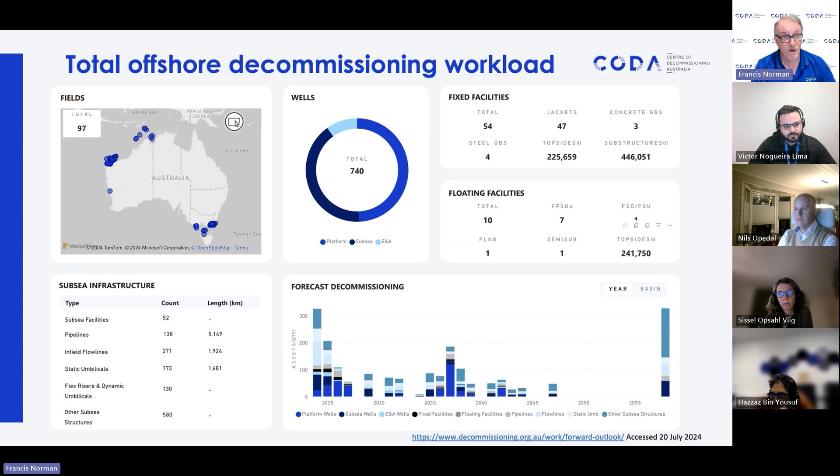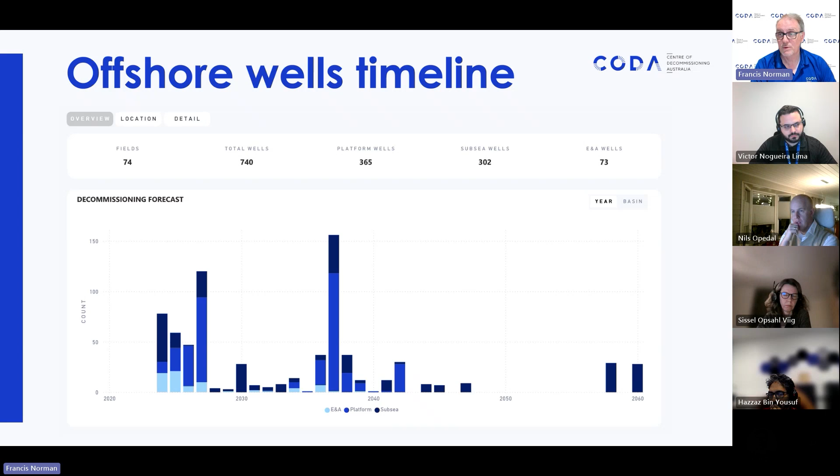In the well space, as you see in the middle on the screen there, 740 offshore wells are still classed as active. So we've got a lot of work ahead of us here as we go forward. The timeline for those wells is what you can see - this is again a screenshot from that same database, and it gives you a real sense of the time frame. Over the next 5 to 10 years, we've got a lot of wells work to do in the offshore space across Australia, plus of course onshore - we're a large continent, we've drilled a lot of holes in the ground over the years.

There's well over 10,000 wells spread across Australia. These are in all different sorts of conditions, in all different states and territories across the country. We are undertaking some work at the moment to progressively start to quantify the onshore well count in a similar way to what I've just shown you for the offshore side. So that gives you a sense of where we are and what we've got going on.

When we established the center and were granted this center, we identified 6 different topics to be evaluated: well integrity, sealing properties of barrier materials, placement of barrier material, verification, and also whether petroleum wells could be reused for storage or disposal. Clearly, P&A tools and operations are very important, and also how to evaluate the results to further utilize them for technology qualification and developing innovations.

So we looked at the industry organization, what is the primary impact towards industry? And for these different topics, we see that we divided it into standards and regulations.

A key here is the NORSOK regulation, developed for the Norwegian continental shelf, but referred to globally. Some topics refer to the operation itself, and a third category is material selection, which we see includes all 6 topics. That's a very important aspect of how to further develop new and cost-efficient technologies.

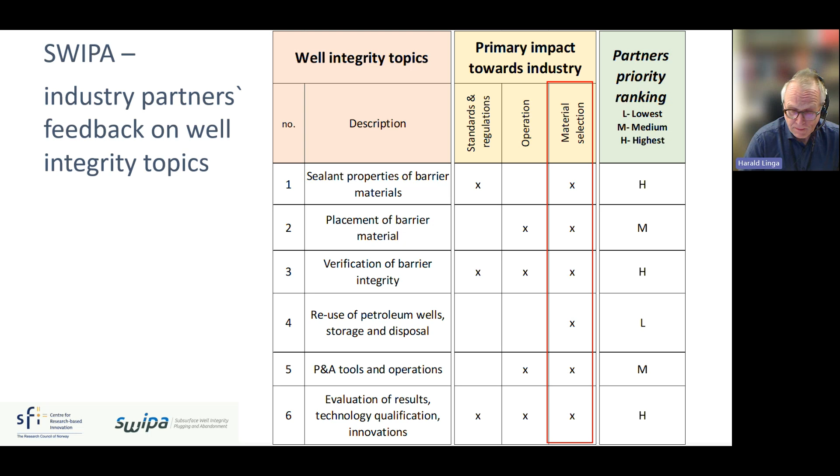The work packages are divided into 4. We have work package 1 and 2, addressing lower technical readiness level scientific studies, laboratory studies at small and medium scales. We also have a separate package on upscaling and testing, where for some materials and results we test the technologies at a higher scale.

Work package 1 and 2 is mainly covered by SINTEF and IFE and the universities, whereas work package 3 is carried out essentially by NORCE at the Ullrigg test site. And we have a special work package on further selecting the results and defining what should be used for further developments. That's work package 4.

As such, SWIPA is a state-funded center. That means we can take the state monies given to the center and direct it into specific technologies or IP technologies for user partners. So a key here is to generate spin-off projects for further elevating the technical readiness level for selected results.

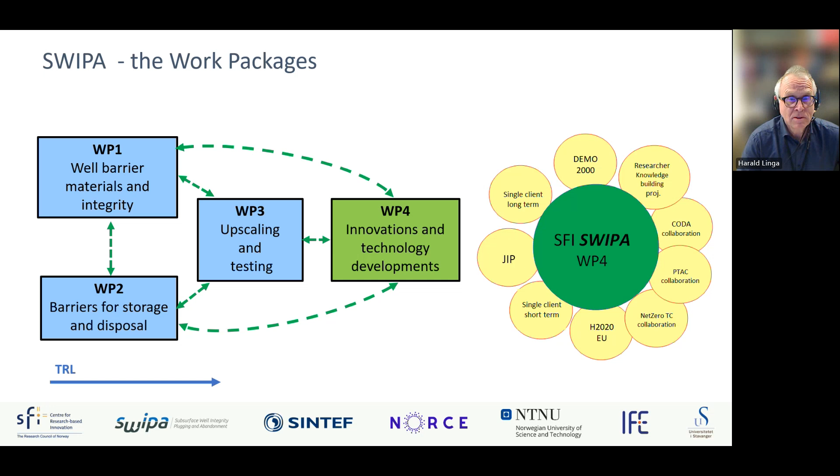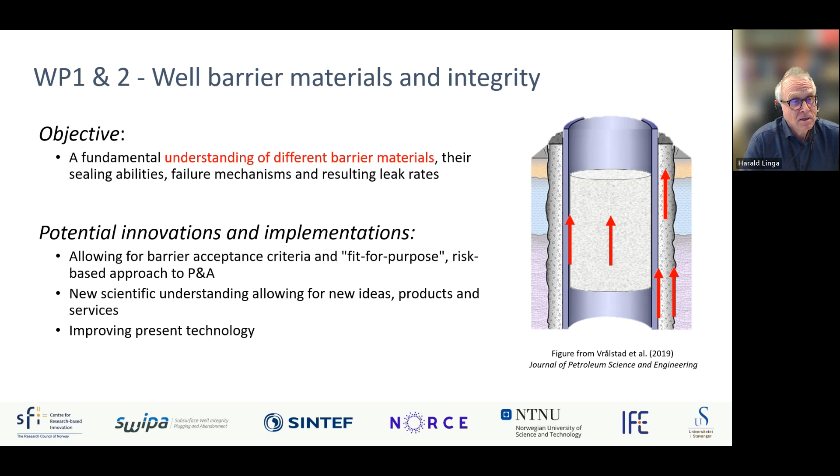Work package 1 and 2, in a way, relates to the fundamental understanding of different barrier materials. So we will potentially use the results for innovation, acceptance criteria, new scientific understanding, and utilize this for improving the present technology. For the upscaling and testing, we investigate the physical and operation scaling effects, comparing the results.

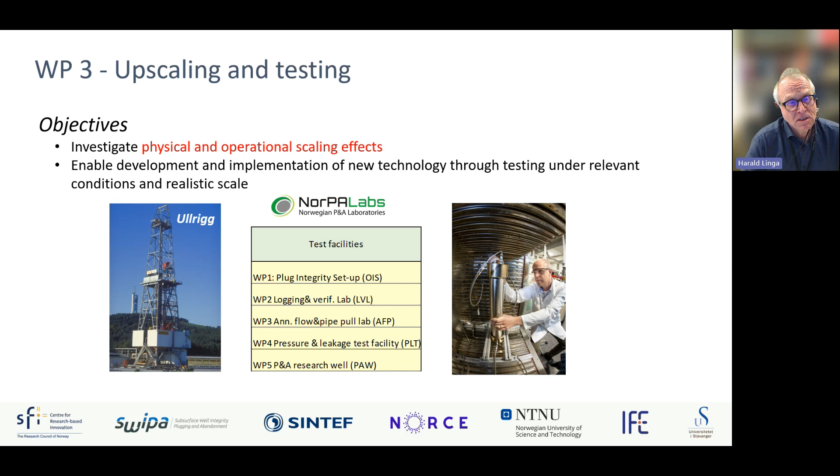As derived at small and medium lab scale, we utilize the Norwegian P&A laboratories, which is an infrastructure grant given by the Research Council for a range of test facilities, also including a P&A research well at large scale.

The operators, when joining the center, looked at this center with a key target to gain a more scientifically based understanding of what is necessary as a well barrier. That includes safety margins and also looking at the barrier elements as a whole, including the formation. So that in a way directs the motivation for joining, to gain more fundamental research within P&A, well barriers and integrity.

And also the operators stated that when it comes to innovation-based technologies, clearly the implementation also needs to have a scientific basis and also to evaluate the results. So operators also considered that the resources in SWIPA could be relevant for testing and performing quality assurance for new technology developments.

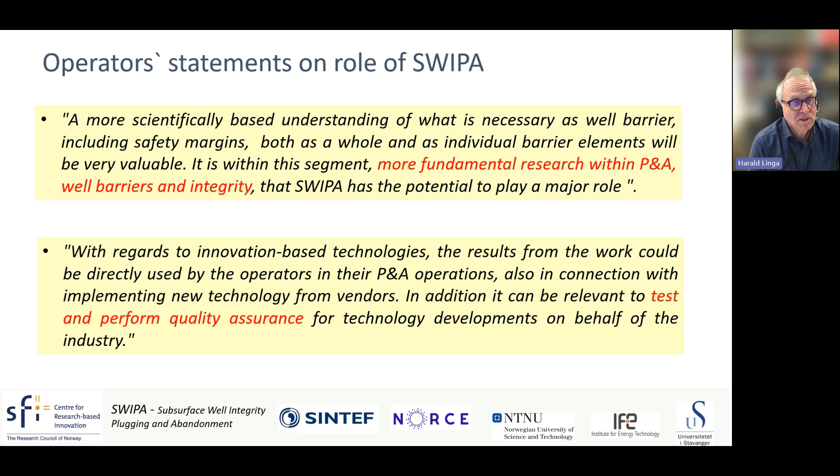So for the ambitions and expectations, to summarize, we aim to obtain a scientific understanding of permanent well barriers, allowing for improved well barrier design methodologies. Key parameters will be costs, materials, barrier lengths, and operations. And we have an ambitious target to reduce the cost by 50% for P&A operations, which also includes revised standards and regulations.

So we have got quite some attention. Bloomberg stated, when the first part of the center was announced, that Norway bets on tech to cut 100 billion North Sea oil well bill. So we have got a lot of attention for this because it's very important for the Norwegian state.

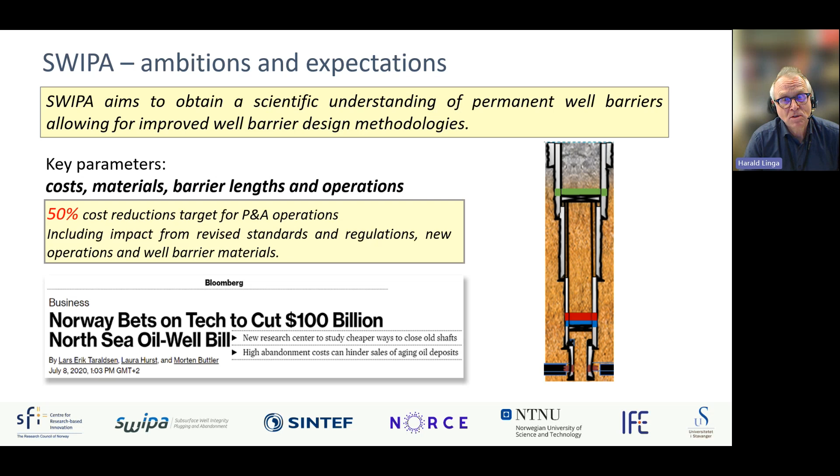It has been estimated to cost 80 billion US dollars to close the 3,000 wells in the years up to 2050.

Collaboration is very important for having success. We have the research partners, which in a way form the national team in well integrity in Norway. With the 5 R&D partners, we have international collaboration, and we also collaborate with national and international authorities, the HAVTIL, which is the former Petroleum Safety Authority, and 3 international partners: Net Zero Technology, CODA, and PTAC.

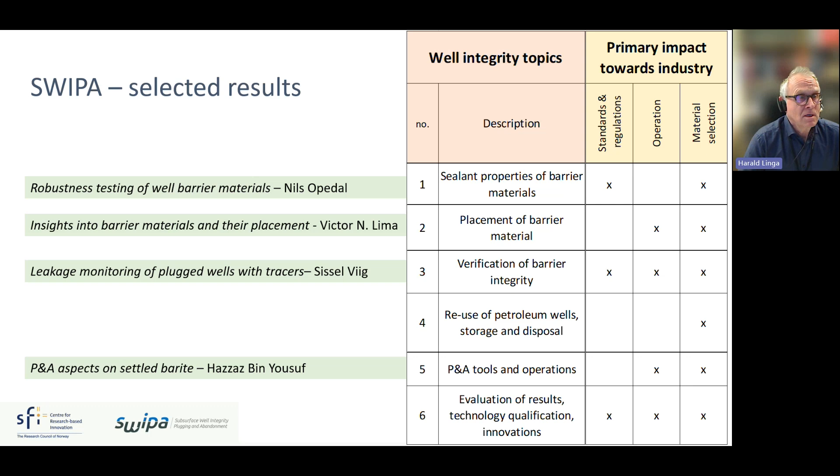So for the SWIPA selected results, we will show as we go along. We have selected for presentation: robustness testing of well barrier materials with Nils, P&A aspects on settled barite by Hazzaz, leakage monitoring by Sissel, and the insight into barrier materials and their placement by Victor. So that summarizes my introduction.

Thank you. Excellent. Thank you very much, Harald. Just as you finished there was a question came in, so I'll ask you that one before I ask you one of the ones that I've got scribbled down here as well.

Do you have a work package on repairing deficient barriers, either side tracks or leaking or misfit barriers? We don't have a specific work package, but we have a lot of testing with new barrier materials which could be used for such a purpose.

Yes, very good, excellent, thank you for that one. While you're talking about new barrier materials, there are lots of alternatives out there now, and just what are your thoughts in terms of how SWIPA would work with those and work with the partners around finding tailor-made solutions with some of those new barrier materials?

We think that can be a vehicle for further utilizing the creativity among the researchers. We have specific know-how on materials and also solutions, not so much operational experience, but I think that the collaboration with the researchers and the industry could be very valuable and give some spin-off ideas and push the technology forward.

So I guess Harald presented this slide also, but I'll go briefly through it. The objective of WP1, the Barrier Materials and Integrity Work Package, what we want to do here is in more scientific detail, try to understand more, not only the barrier materials, as in casing, cement and caprock, but also the sealing abilities, which means also the interplay or the interfaces.

So we do some of the work on a single material alone, but what is more important for us in most cases is also to have bi or three component systems where we try to look at the whole wellbore system. In our experience, most materials are impermeable and solid and robust enough, but often it's the interface that will lead to any kinds of failure or problem in a real well. So we look at the failure mechanism and also the resulting leakage rate.

So the potential innovations, or why we're doing this, is trying to investigate more in detail so we can give a fit-for-purpose design for future wells. Also looking into new materials and new ideas as to how to do well integrity and decommissioning in a better or cheaper way.

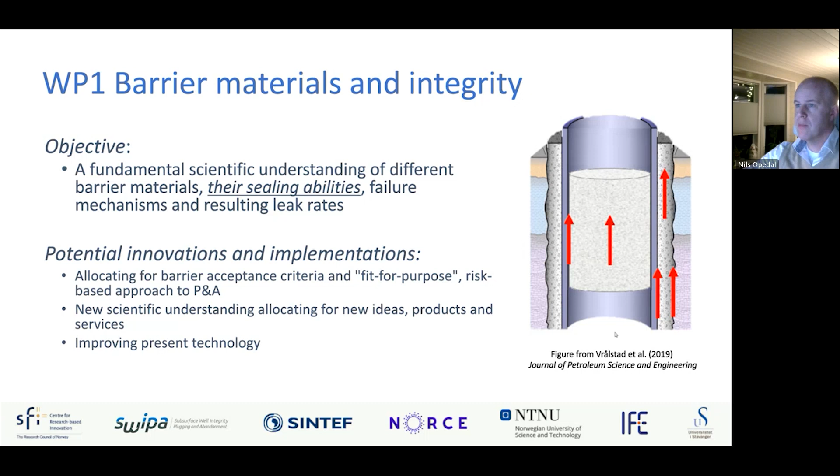Today's presentation will focus more in detail on what we have done, are doing, and will do in package 1.2, again towards the robustness of annular materials.

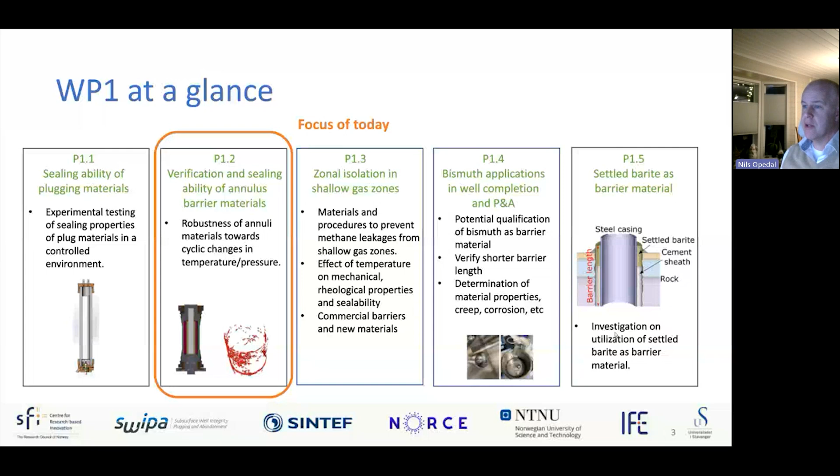We have been doing this now, in the scientific community, for a few years. For SINTEF, we have been doing this kind of testing for about 12 years now. The original motivation and relevance was to investigate the effect of cyclic changes of either temperature or pressure for different wells. It could be for production wells, injection, pressure testing, and so on, and for different well types also - gas storage, production, geothermal, or CCS wells. Different wells will have more or less different magnitudes of cyclic changes. So that was our motivation for starting this.

So the initial objective was: can we recreate cement sheath failure in a laboratory, meaning in a controlled setting? So we should somehow be able to manage this in a laboratory setting. The first thought process was, how are we going to be able to downscale this to a manageable scale, but still large enough to be somehow relevant?

So we took inspiration from a 12.25-inch borehole, a 9 5/8 inch casing, downscaled to about 25%, or a quarter of its value. That gives us specimen dimensions of an outer rock with a height of 15 centimeters and a diameter of 20 centimeters. You see Thomas holding a specimen there, so that's about the dimension of at least the first test. We have evolved the testing over the years with different cells with different capabilities, but most of them more or less follow the same order of magnitude in medium scale specimens, if you like.

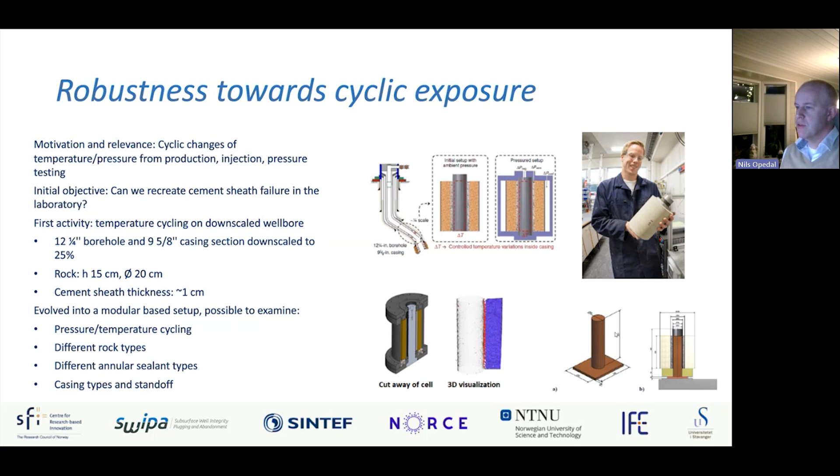Likewise, for the pressure, we have a pressure shaft or mandrel - I'm not sure what it's called in English. Anyway, hydraulically we're able to manipulate the inner casing pressure, where we can again impose different kinds of cyclic stresses from the inside of the casing.

So that was a little bit of what we do with it, a little bit now on what we want to measure, or what we can measure. When we started some years ago, we sat and thought, okay, we can do something with it. We can apply different temperature cycles to our specimens. How can we really measure something?

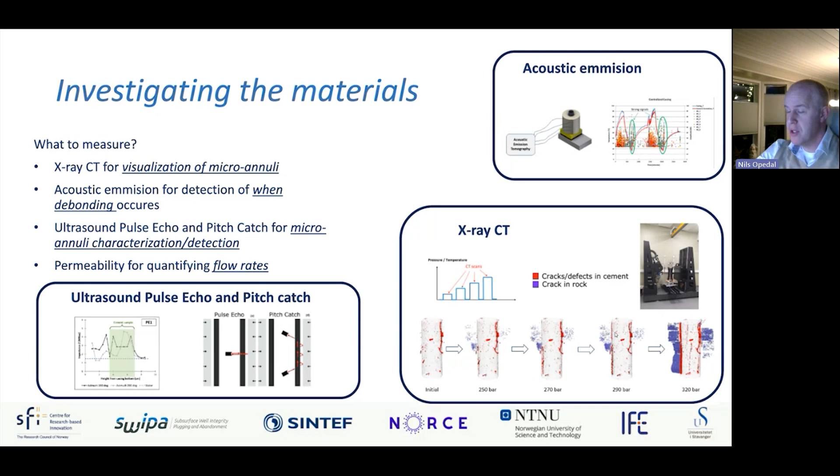I don't have any photographs indicating the permeability test because the slide was full, so I'll move on to the next slide, showing some highlights, some results of what we have from SWIPA, but also from other projects, on our understanding of fluid behavior or fluid permeability in the microannulus for these kinds of specimens.

So how do we do this? There's a very basic P&ID of the permeability test setup where we have a cell. We have multiple cells, which we are able to use to manipulate the confinement pressure, the inner casing pressure, and also the pore pressure. So we can do a magnitude of different things with our cells here.

So what we see when we do this kind of test is that the flow paths, or the microannulus, are elastic within a certain range. When you say flow paths are elastic, it means in essence the materials, cement, rock, are elastic. So that means that, for instance, if you have a mild increase in casing pressure, you can observe a decrease in the flow rate. That is also reproducible when you deplete the pressure.

For this kind of testing, where we have rock and cement and casing, so 3 component systems, we have seemingly lower levels of sensitivity to the confinement pressure. We don't really know why that is yet, since this is quite a new set of testing that we're doing. It could be due to an additional material that absorbs stress, or it could be due to an additional interface that absorbs stress. Another thing that we haven't studied yet is how filter cake will behave in this kind of scenario.

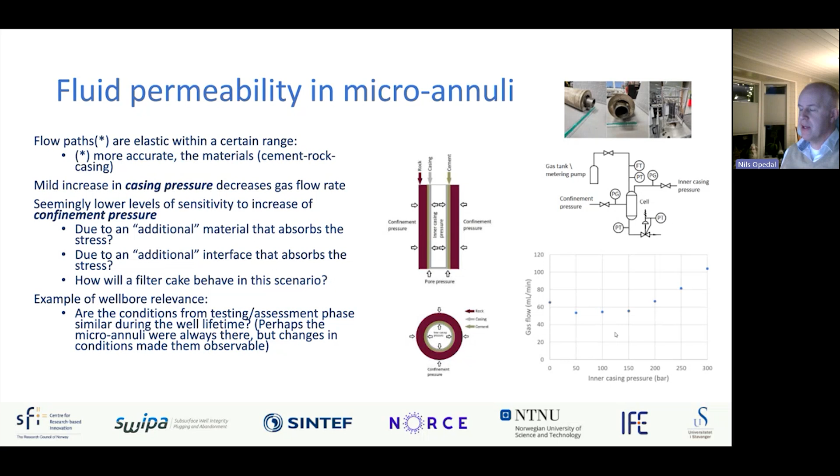Moving on a little bit, still on fluid permeability in microannulus. Fluids mean gas and liquid, and we do both kinds of testing out of scientific curiosity. When we say gas, it means in essence nitrogen, and liquid is brine, can also be CO2 brine in some other projects. The comparison between nitrogen and brine flow in this kind of narrow microannulus is not always straightforward.

The case if you have a dry microannulus and flowing gas through it is pretty straightforward. But if you have, for instance, a submerged sample with the microannulus filled with water and you apply gas through it, the behavior is sometimes a little bit more difficult to understand.

An example on the right-hand side shows gas being tested through a microannulus, and you see it doesn't really stabilize when you have a differential pressure. The measured flow rate doesn't stabilize, showing this seemingly bellow effect when the gas is migrating through a water-filled microannulus.

The bottom right graph shows two sets of samples or tests, one with a dry sample and gas flow, where as you increase the differential pressure, the gas flow increases linearly. Same thing when you do the hysteresis test going down again, it follows more or less the same line.

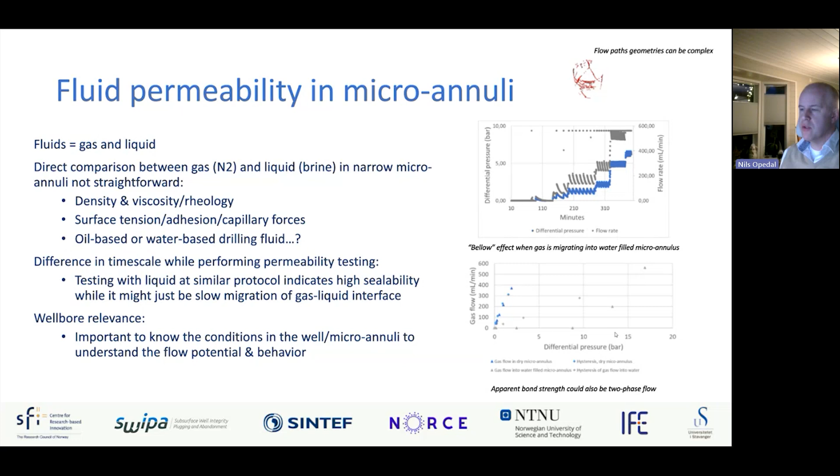An example on the top right is a bit small, but in red, sometimes the flow path geometries can be quite complex. So the wellbore relevance here is that it's important to know the conditions in a well or microannulus to understand the flow potential and behavior.

Second to last slide, I think. When we do mild increases or changes in the casing pressure or confinement pressure, we see more of an elastic region of microannulus size and shape. If we have more drastic or severe casing pressures, we see that we can generate larger fractures in both the cement and also in the rock face.

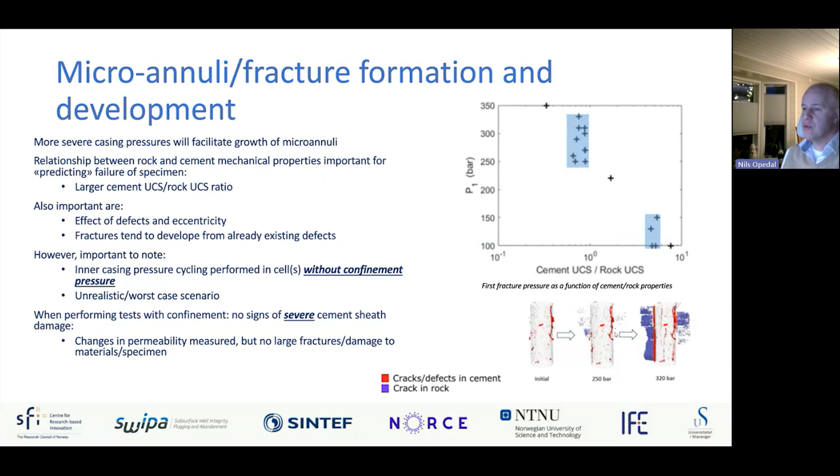It should be noted that some of these tests, in terms of relevance for the industry, have been performed without confinement pressure. That means the specimens or materials will behave differently than they would in a wellbore. So when we get results like this, our understanding is that this is an unrealistic, absolute worst-case scenario, because for most cement and most wells you will not have a pressure difference of 200 or 300 bars, or at least you will have confinement pressure from the surrounding rock in your well.

To summarize, over the years we have evolved our setups with different kinds investigating different items. We are able to examine different rock types, different annular sealant types, casing type and standoff, in a controlled laboratory setting where we can do pressure or temperature cycling tests. This gives us details on how and where cement-rock interfaces or materials fail, and also enables us to investigate multiple interfaces and the behavior of the microannulus. This is relevant for injection, geothermal, gas storage, and/or CCS wells.

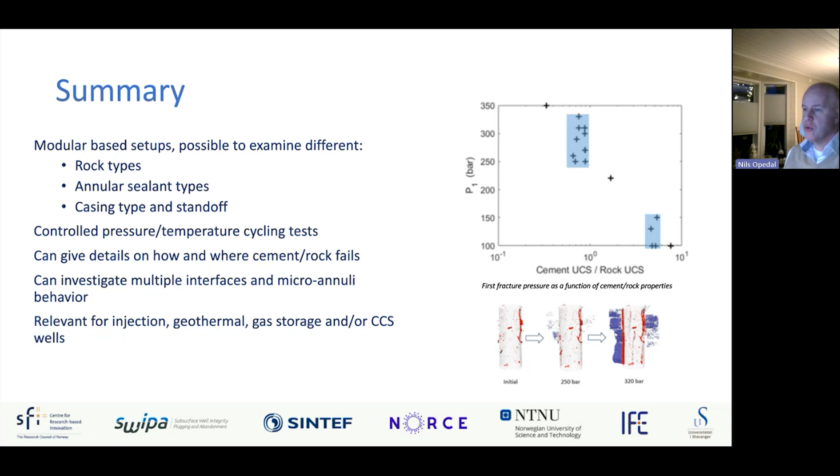I'm not sure if I'm over my time slot here, but that was my last slide, so I'll be happy to take any questions.

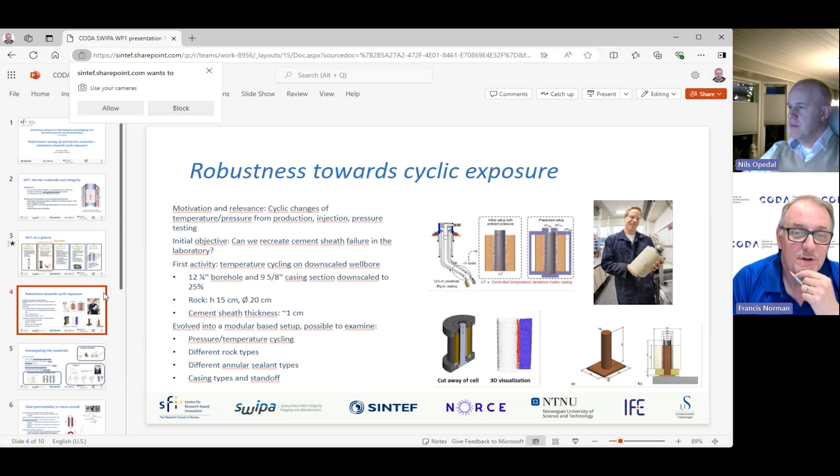The biggest thing is that we have done a lot, but there are many materials in terms of rocks and cement types that we haven't tested yet. So one focus is on different materials, we'd like to fill in a larger catalog or library of material types in relation to each other. Another focus has been implementing the ultrasound probe. We have this for small-scale tests in the CT setup, but we're trying to implement it on the large-scale setup, which is difficult with larger scales and pressure types. We want to test both permeability and visualization on specimens, getting details on the ultrasound response to learn more on the logging side.

Very good, thank you. Having given people a minute or two to put a question in, we have an interesting one here. It's a two-parter, so I'll ask part one first. Are you able to create scenarios to model downhole formation stress changes on cement sheaths over time?

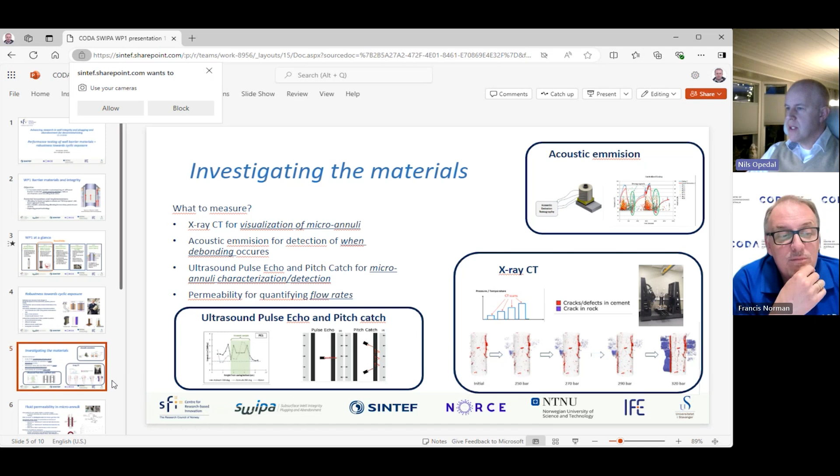Yes, if I understand correctly. So how can I show this then? The specimens look like this, three components: rock face, cement, and casing. When we do this testing, we haven't done all the different settings yet, but we're able to manipulate casing pressure, pore pressure, and confinement pressure. We haven't investigated the effect of confinement pressure much yet, but that's something we're looking into now. Again, a library catalog of different materials, but also for the same three-component materials, investigating the cycling effect of both inner casing and confinement pressure to see how at different pressures a rock behaves in relation to cement - in essence, the interfaces. That's something we're just starting to scratch the surface on, but we're looking more into that now. So the answer is yes, if I understood the question correctly, we're starting that now.

The second question is, do your analyses cover future impact of CO2 related activities on legacy cement? Yes, we're able to perform permeability or flow testing. That's also on our to-do list. We're a bit behind schedule, but it's definitely on our to-do list for the same kind of specimens talked about here. We can easily shift from nitrogen gas flow to brine CO2 flow through this test to see how self-sealing effects and so on will occur in these test specimens. This is definitely something we're going to look into. We were hoping to be finalized by this autumn, but in essence it will mean probably next year - that's how time goes. But yes, we have the capability for these kinds of tests, and it's something we're looking into.

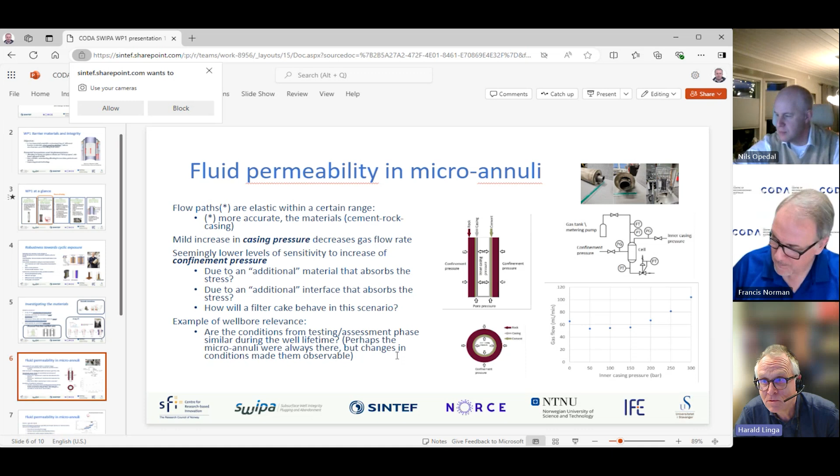Yeah, this confinement pressure is clearly an important issue. I think you have indicated, Nils, in the UCS results, or the impact from UCS for rock versus cement, that this is really addressing or impacting the performance of the formation-to-formation sealability. So we still have some more work to do there, but it's clearly very important, as Nils has indicated in this graph upper right.

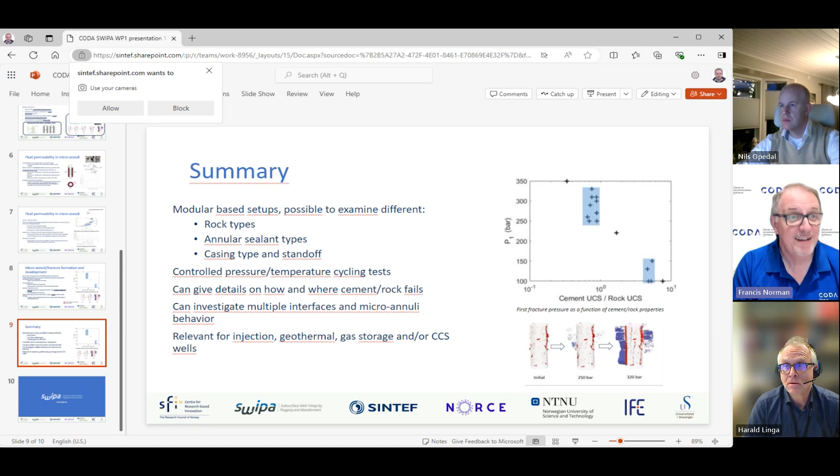I'd like to welcome you to my presentation on settled barite as an annular barrier, characterization and refinement, which I am currently doing as my PhD topic, and this is my third year in PhD.

First, I would like to say a little bit about myself. I am currently a PhD candidate at UIS. I completed my master's in petroleum engineering from NTNU, and then I worked in Chevron for 7 years, where I did everything: drilling engineer, onshore, offshore, intervention drilling, P&A, perforation, rig inspection, acceptance, everything. After that, I moved to Norway and started my PhD.

Let's talk a little bit about our agenda. I'll talk about our background, the type of methodology we are currently using, a little bit about our results, a little bit about the potential, how we can use my research in the industry, and what my deliverables are. I hope you will see something very interesting in my presentation.

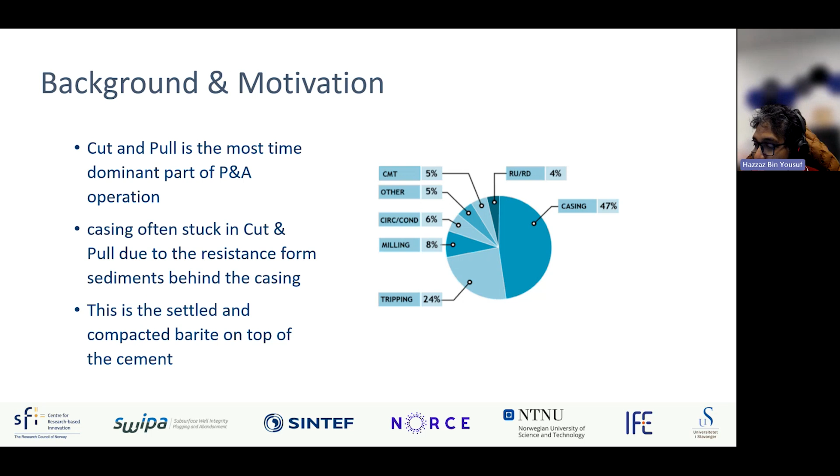So my research is very simple. I have to find the reason why it's happening, I have to find a way to solve this problem, and I also have to see if we can use this as a barrier itself. We like using the problem as the solution to reduce the cost in the P&A operation.

As I told you, my plan is very simple: find the reason, find the solution, and find the way to use it. We believe there will be different impacts - we can minimize the risk of operation, reduce the time of cut and pull, or if we can turn it into a barrier, we can reduce the P&A time, which ends up saving a lot of money, and we will have a new type of barrier.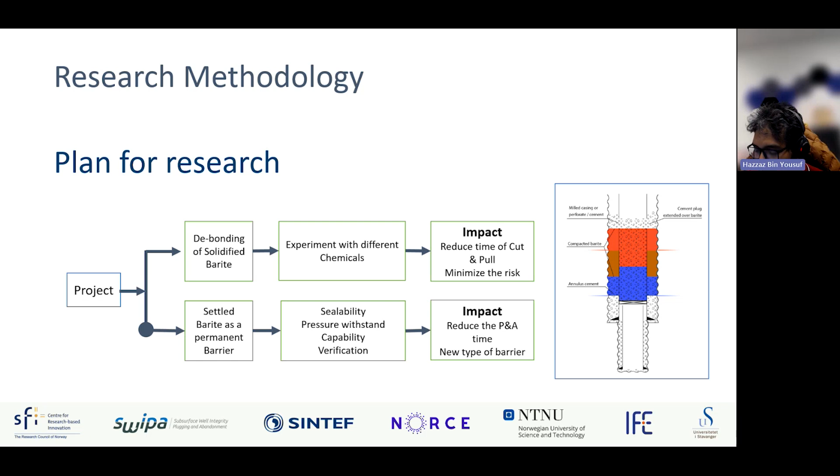We started our research in March 2022, and we were kind of lucky because in August 2022, Equinor told us that they had recovered some pipes full of settled barite from the North Sea, which gave us a big opportunity to look at the real thing and work on it. So we've done a lot of characterization on those materials, a lot of experiments, and after these experiments we found some interesting results.

Firstly, from XRD, we have seen that there are no new phases of barium in this settled barite, which indicates that the settled barite formation process does not involve any reaction.

It is a physical process, and we also see that there is no cementation. The particles are very compacted, but they are really strong.

We tried to look at the elements, and we found one element that is completely new. It was not in the cuttings, and it was not in the drilling fluid either. The element is iron. We have seen a large amount of iron in this material.

We tried to do a QEMSCAN to see how the materials are arranged, and we saw that this iron is actually creating bridges between the barite particles. This solves the answer to our first question: maybe iron is the reason we are having this settled barite problem.

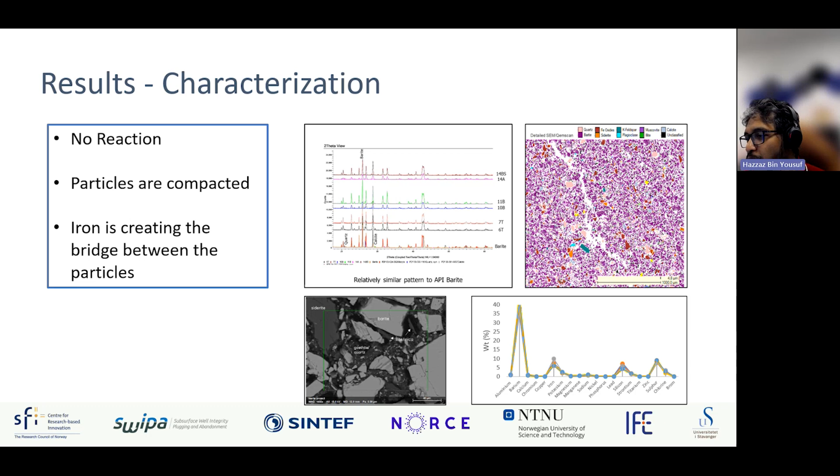Our next job was to find a solution. The solution is to break this settled barite. If we can break it, we can circulate, and if we can circulate, we can do cut and pull the casing out. So we have to find a way to break this settled barite.

There are two ways. One is if we can take the iron out, we are destroying the bridges between the particles, which weakens the particles and solves the problem. Or we can go after the barite itself. If we can dissolve a lot of barite, that helps weaken this settled barite formation.

So we tried chelating agents, and we found that if we use EDTA at normal pH, without any pH modification, it attacks the iron, takes the iron out, and weakens the formation. We also found that if we use EDTA at high pH, like we use for an acid job or a barite scale job, it can also weaken the settled barite formation by dissolving a lot of barium materials.

We also found that the performance depends on the pH and on the concentration of the material, how much EDTA or other chelating agents we use. We found that the whole family of these chelating agents can work to dissolve or disperse the settled barite.

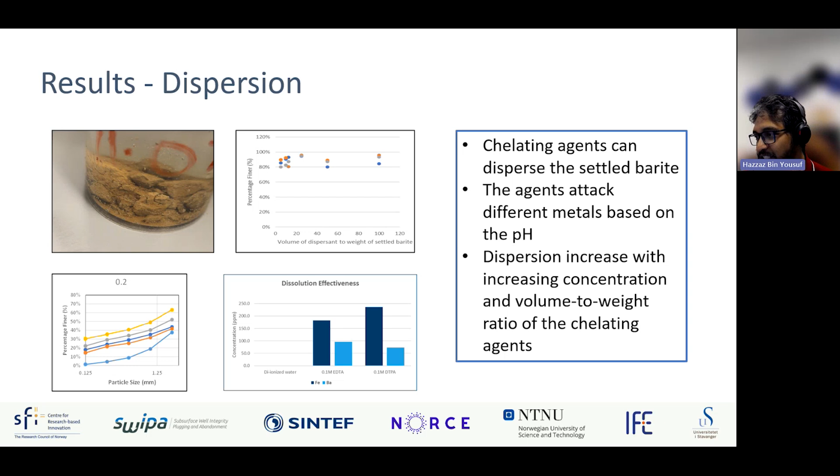Number three is the hardest part: settling and making the settled barite itself. That is, if we can find a recipe which, when pumped, will slowly settle down, compact, and solidify on its own, which can be used as a barrier during the P&A.

So we found in our first research that iron is the reason the settled barite formation happens. We then wanted to test the effect of not only iron but all metal ions, to see if the metal ion itself has this effect, or how metal ions affect the standard drilling fluid. We found some really fascinating results.

We found that trivalent metal ions, both iron and aluminum, destabilize drilling fluid very quickly in a very small amount, within minutes, if we use some kind of iron salt or aluminum salt. The other monovalent and divalent ions don't have that immediate effect. However, if we keep this for 45 days, as you can see from the chart, these other ions can also destabilize the drilling fluid in the long run.

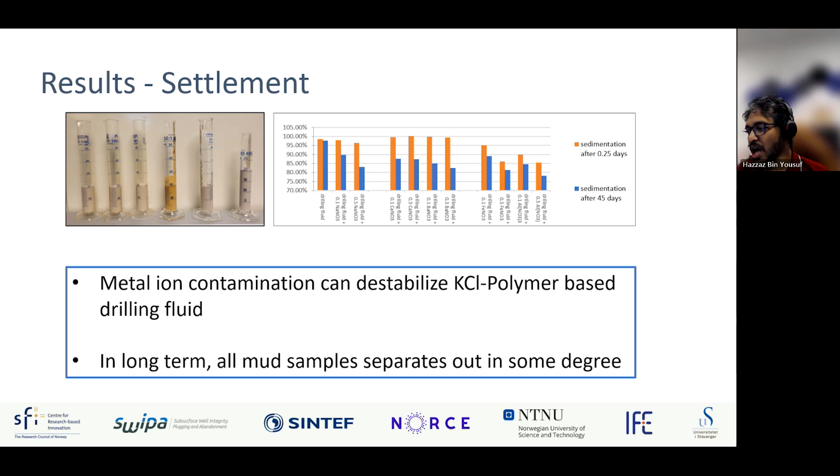So how can we use our research? As I told you, I have 3 objectives: find the reason, find the solution, and find a new barrier. If I can complete all 3, that gives us a lot of potential for industrial use. As we found that iron is responsible for the formation of settled barite, now we know we have to do really good hole cleaning to prevent the problem. We have to get as much iron out of the well as possible so it doesn't go on to destabilize our drilling fluid in the long run.

Number 2 is the solution. We found that if we can take out iron or take out barium, we can solve the problem of settled barite. So now we have to find a solution that can satisfy HSE and other standards, a solution we can use to take iron out of the settled barite material. The problem isn't easy to solve, because we're pumping something that will take iron inside the iron pipe. So it's a bit complicated, but we're currently working on it.

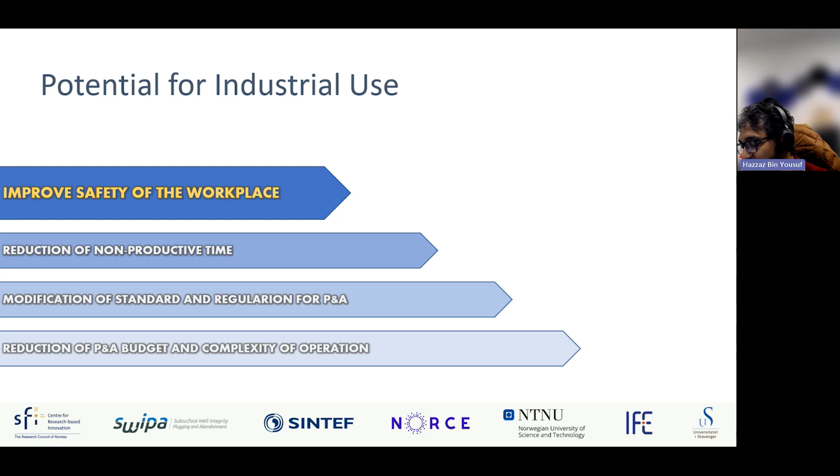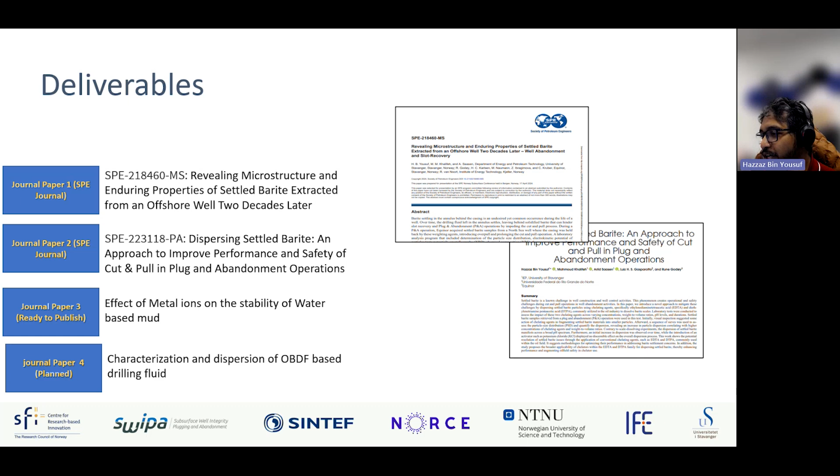Finally, deliverables. We have published 2 journal papers in SPE, you can see them here, and we're currently writing a 3rd journal paper on the effect of metal ions on the stability of water-based mud, as I've shown in the slides. Currently we're working on oil-based mud, similarly trying to characterize this oil-based settled barite, and trying to find a solution to disperse it. We hope we'll find this and can show you some results soon.

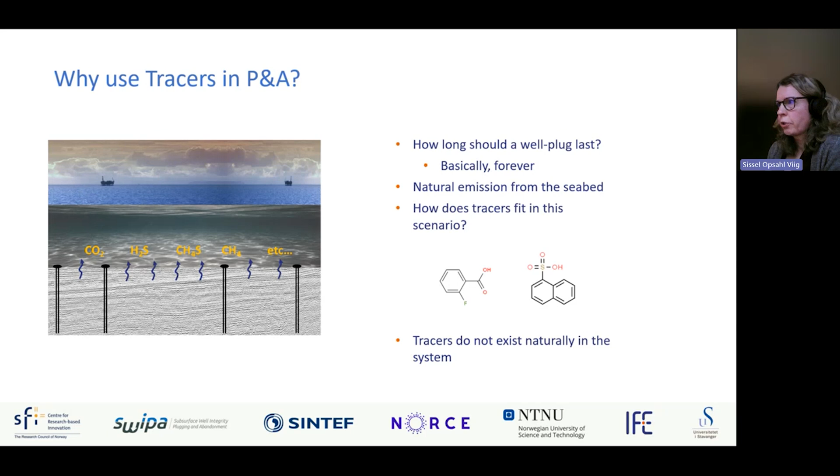So if you include tracers in your plugging system, this tracer will be unique in the environment, and if you detect it at the wellhead, you will know for sure that you have a leakage from your plugged well. In oil and gas operations, tracers are conventionally used for interwell applications to characterize the reservoir, fluid communication, distribution and circulation.

It's also used to evaluate oil saturation in swept volumes. But when it comes to P&A operations, they can be used to monitor fractures, microfractures, or porous matrix communication between the well, a plugged well, and the seabed, acting as an early warning system. Because the tracers are unique in your system, they give you a unique identification of a possible leakage.

Also, in our research, we have been working on water-based tracers. They are already proven for reservoir applications, and they're relatively cheap to be used.

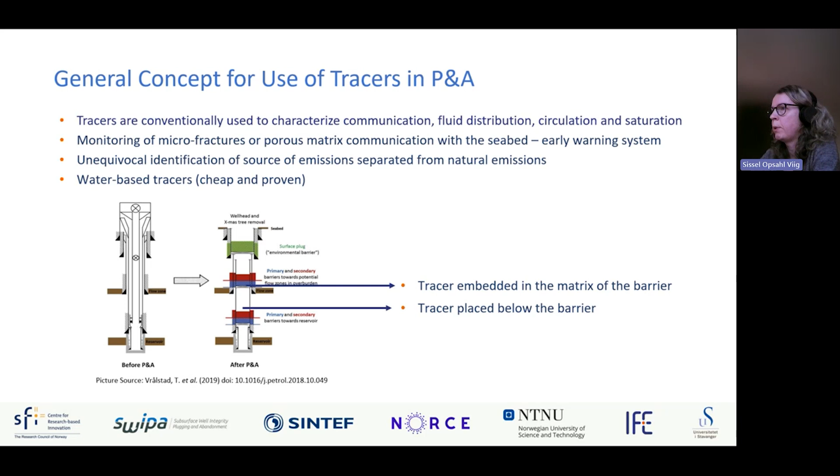In our work we have done laboratory experiments, not any real field applications or research, but we see two possible ways of including tracers in a plugged well. Either the tracers can be embedded in the matrix of the barrier itself, or placed below the barrier, as illustrated in the picture on this slide.

So when we select and develop tracers, they have to fulfill certain criteria. You need to know that the tracer is unique in the system it's going to be introduced to, and that you can detect small concentrations or amounts of it, so it's easy to detect even small leakages. Normally we can analyze down to PPT level of a tracer. They need to be environmentally acceptable, and they have to have a reasonable cost.

And when you have some tracer candidates selected based on these criteria, they have to be qualified for the system they're going to be studied in. They need to be stable for the time frame of your test, both in temperature, chemical stability, and biological stability. It's also important that they don't interact with anything in your system. You don't want them to soak into any surfaces, because this will prevent you from monitoring your tracer. You also need to investigate the dynamic and flooding properties of the tracers at conditions relevant for your system, to know that it's matching the movement of the phase it's supposed to trace.

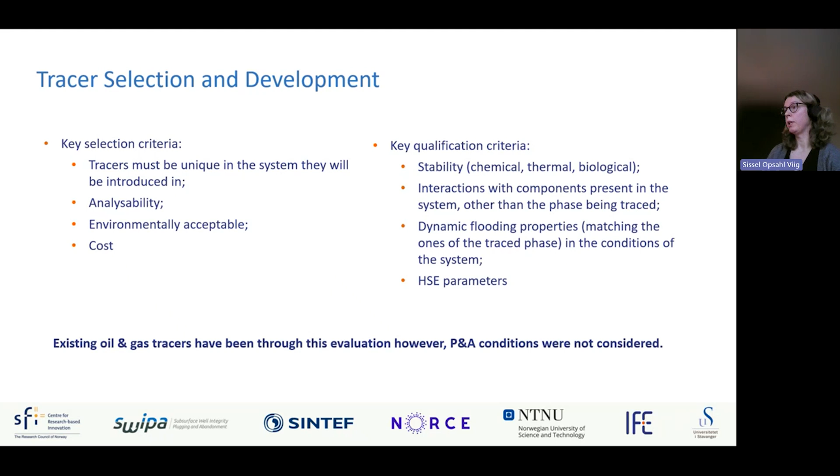And then, of course, you have the HSE parameters. For the tracers we are studying, the existing oil and water tracers for oil and gas reservoir applications, they have been qualified on all these criteria. But when it comes to plug and abandonment, the conditions are different. We have different materials, and they might interact with the plug material, for example, and this is something that has not been considered. So it's important for future development.

As I said, we need to know that the tracers that flow through the system don't interact with any surface. In a plugged well, the barrier material, like cement, is highly active surface, and it's likely there might be an interaction between the tracer molecules and the cement or other plugging materials. So that's something important to investigate.

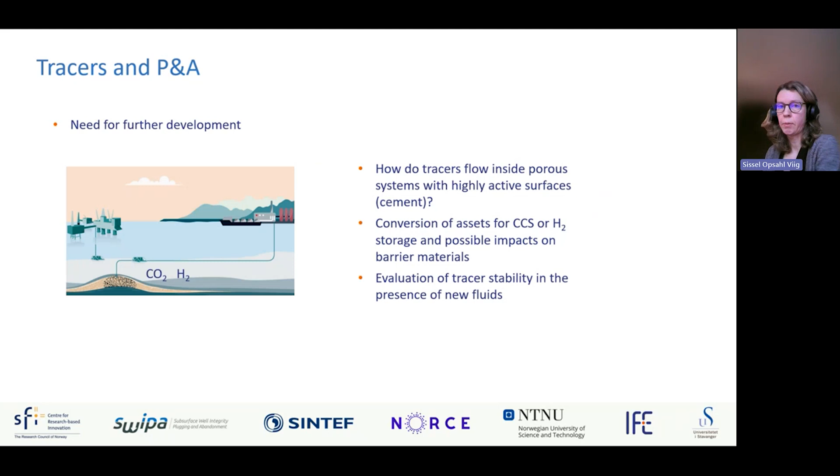Also, you have assets that are converted into storage sites for CO2 or hydrogen that can possibly impact the barrier material, but can also influence the tracer stability itself. So this is something important to investigate further.

So how do we then work to qualify tracers for P&A operations? We have been doing two different types of experiments so far. The first type is batch type experiments to study temperature stability and possible sorption characteristics of the tracers together with selected barrier materials. In our test, we selected some traditional water tracers and also a couple of oil water partitioning tracers. We tested 3 different types of plugging materials: 2 types of cements and 1 geopolymer.

We exposed our samples to different temperatures, from 60 degrees Celsius up to 120 degrees Celsius. Our tracers were dissolved in synthetic formation water and then exposed to the temperature and the plugging materials for 1, 4, and 8 weeks to look at the stability.

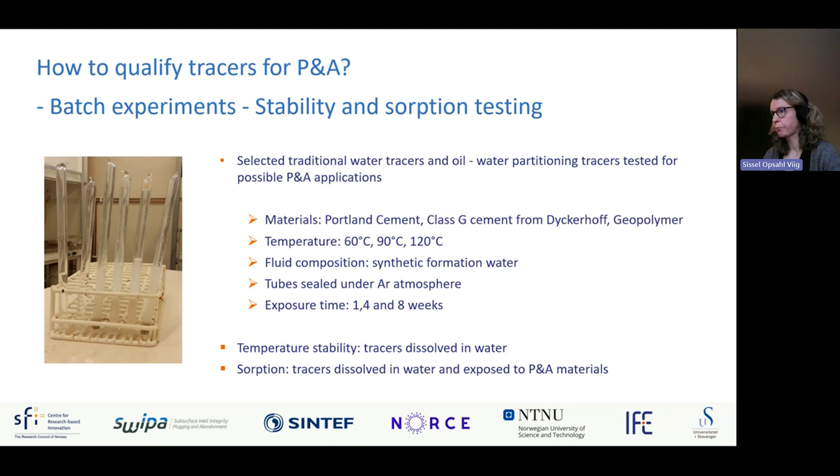For the batch experiments, we have 2 sets. One is purely temperature stability investigation, where the tracers are dissolved in water with no barrier material present. The other studies sorption or other interaction between the tracer and the barrier material, where the tracers are dissolved in water and crushed barrier material is also present. They are exposed for up to 8 weeks at 3 different temperatures.

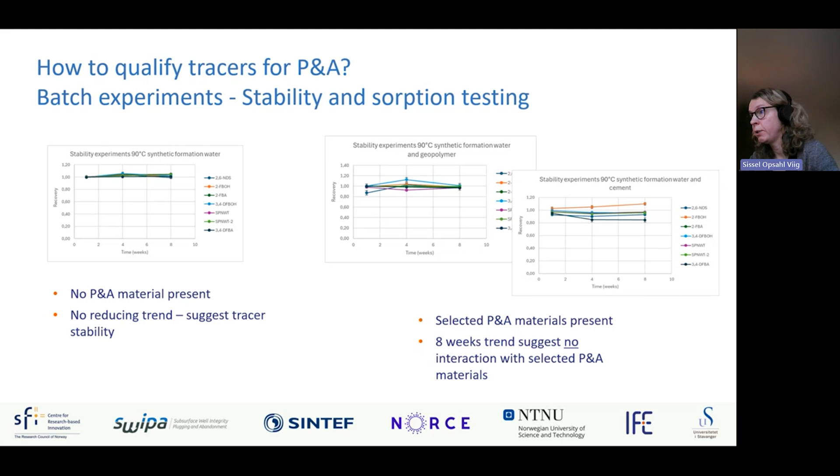On the right-hand side, we see results from experiments where we introduced plugging materials: tracers exposed to 90 degrees Celsius with geopolymer present, and tracers exposed to 90 degrees Celsius with cement class G present. Again, exposure time is on the x-axis and recovery on the y-axis. There is some spread in the results, but we don't see any reduction in the tracer concentrations after 8 weeks. This indicates that we don't have any interaction between the selected plugging materials and the tracers included in the test. That was the results we have so far from batch experiments.

We did two types of experiments in this one. One was a step injection, and to perform this experiment, we inject the tracer continuously into the fluid flow, and it's moving through the plug, and then it's produced, and we continue the experiment until we reach a stable level of tracer concentration at the outlet, where the concentration matched the concentration in the injected solution.

The other type of experiment was a pulse type injection, where we injected the tracer, a small volume of tracers, as a pulse, which moves with the water through the system, and we get a tracer pulse at the outlet. To perform these experiments, we included 8 water tracers and also a reference tracer, tritium-labeled water, which is a radioactive water molecule that is the ideal reference tracer for water.

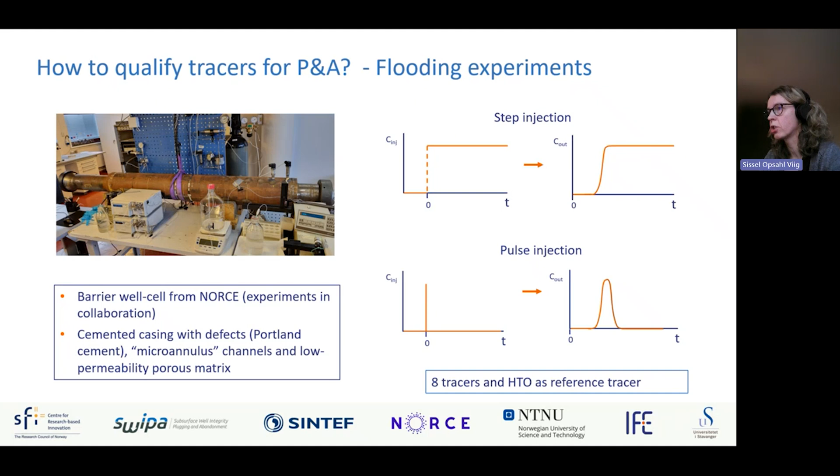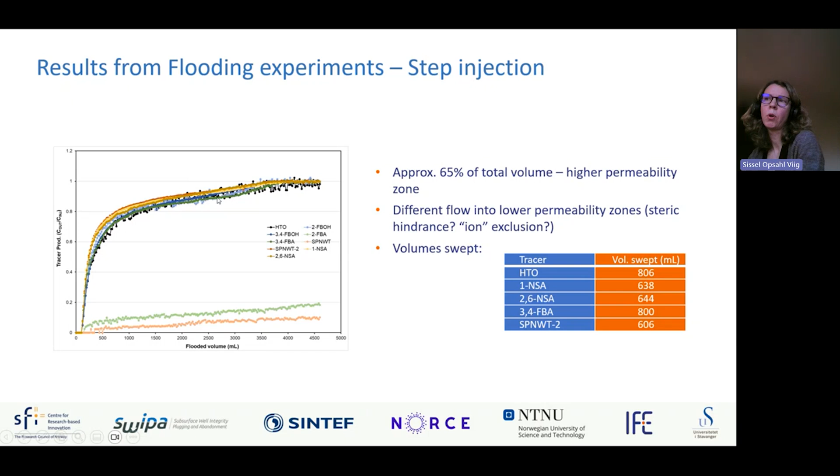If you look further into the curves, what type of information can we gain about the system it has been flowing through? We see that we have a steep increase in tracer concentration at the beginning before it continues to increase, but with a much slower increase until it reaches a stable level. To interpret this, for this part where we have the steep curve, we probably have a high permeable channel. And here, this slow increase in tracer concentration shows that we also have some low permeability zones where the tracer moves through.

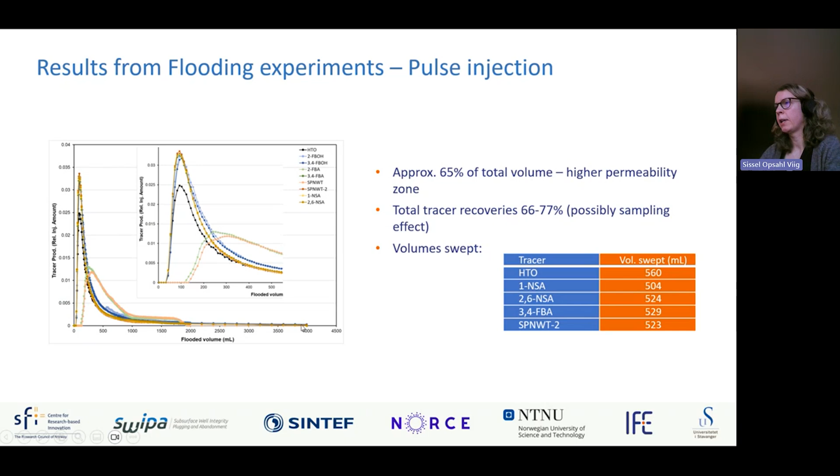Switching to the next slide, you see results from a pulse injection of the tracers. Here we also see that most of the tracers follow the same trend as the ideal reference tracer, except for the two same tracers we saw on the previous slide that have a deviation from ideal behavior and are retained through the system. Again, we see that a big part of the tracer signal is a steep pulse, a sharp curve, which is the tracers moving through a high permeable channel. Then we have this long tail indicating low permeability zones where the tracer continues to move through for a long time period, even after we stopped collecting samples.

So to sum up our results, we see that the conventional water tracers can be used as a basis for long-term monitoring of wells after permanent P&A operation. But there's a need for studying their interaction with different plugging materials, because we have observed that some of the tracers don't behave as expected or as we wanted, together with some selected materials.

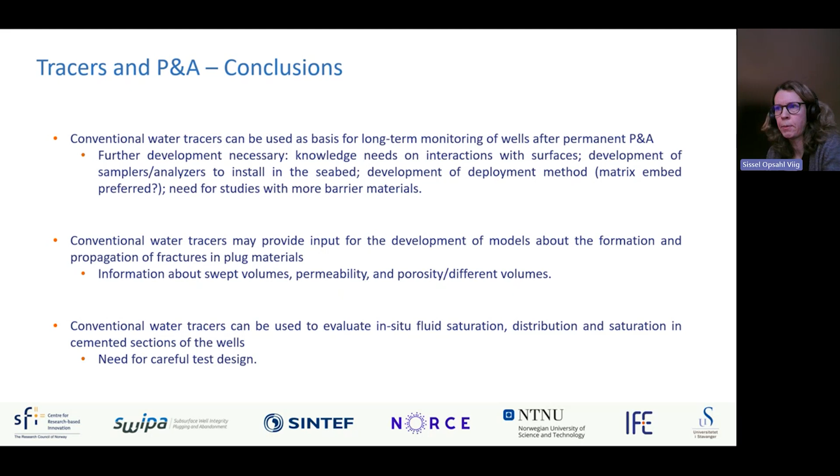It's also a need to develop a sampler or analyzer to be installed in the seabed to continuously monitor possible leakages. And it's a need to develop a deployment method of the tracers within the well. We see that we can gain information about swept volumes, permeability, and porosity from a system, and that this can provide input into development of models about the formation and propagation of fractures in plug materials. And we see that conventional water tracers can be used to evaluate in situ fluid saturation and distribution in cemented sections of the well, but that there's a need for careful test design.

Yep. And that was everything from me.

Thank you. That was really interesting.

Thank you, Sissel. I was having flashbacks there to the early days in my engineering career when I used to work with chromatographs, and some of the graphs you were showing looked very similar to what we used to see as the gas would flow through the different capillaries. But that's a completely different part of industry, really, really interesting there.

Thank you. While we wait, we have a question. Excellent, that's good, I don't even have to go to my own here. So we've got one here.

Interesting use for tracers to monitor P&A wells, but they have a relatively short life, 10 years max I believe. Won't this limit their use in P&A wells where leaks may take years to develop? Do you have any thoughts on that?

When it comes to the stability of these tracers, one of the reasons we started to look into the conventional water tracers that have been used for reservoir applications is that we know they have a long stability in reservoir.

If you do an interwell tracer injection in an offshore region, it might take years before it goes through, and then it even circulates because of re-injection. We know that we can continue to detect the tracers for a really long period. Our experience is that these tracers for reservoir applications have long stability, and should also be useful for this.

But of course, it always needs careful test design to look at the stability at the correct conditions and how to deploy them and how you will actually be able to monitor it. Yeah, careful selection of the right materials. Very good. Yes, that was great.

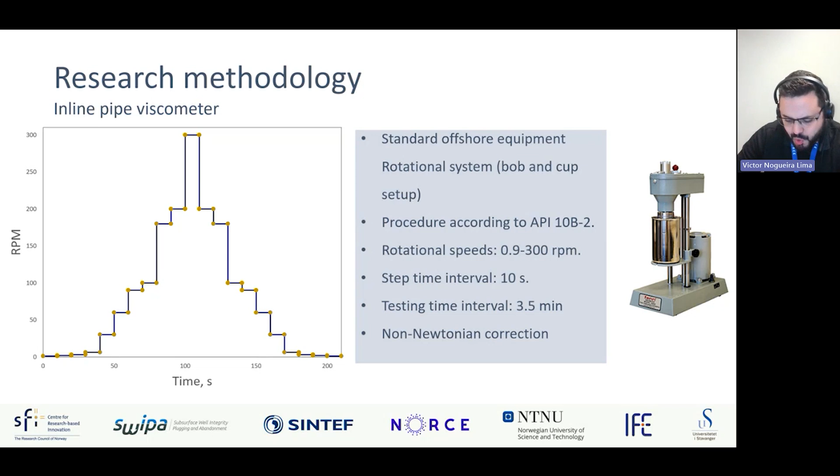So when we initiated this placement project inside SWIPA, the idea was to propose something that we could do the measurement inline while we were mixing and conditioning the slurry. So we proposed the use of...

...a pipe viscometer, where we had a set of DP sensors 1.5 meters apart. Also a Coriolis flow meter, where we could have flow measurement and also density measurement. Also a screw pump. This screw pump is a very good feature because we can ensure that we have the flow without any pulsation effects, so we can ensure that we have this smooth curve when reading the flow measurement and also the DP, and also a temperature sensor, so we can make sure that all the variations we read when it comes to pressure variations is related to temperature rather than variations into the slurry properties by itself.

So this setup is connected in parallel to a batch mixer, as you can see here, and this is used to run the sequences, where we can grab the raw data, which is basically the one that we can see up here. That is the flow and the DP through time, and this flow rate and DP through time we can easily convert to shear stress and shear rate using some calculations.

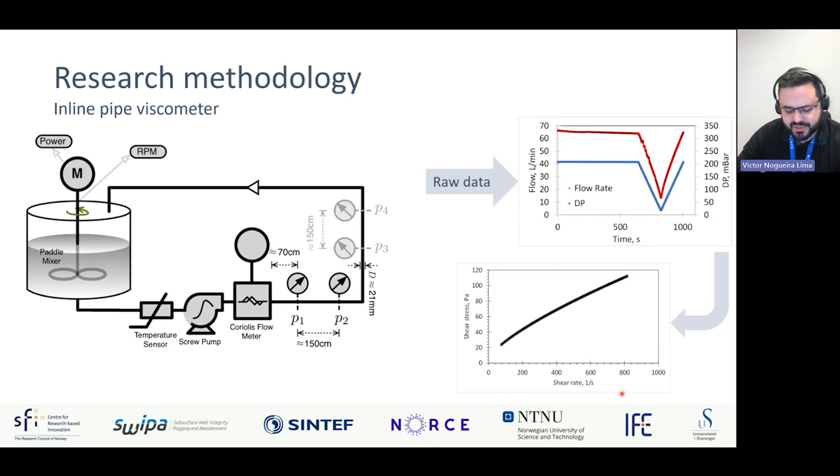So the latest operation that we used this pipe viscometer for was a commissioning test in the NorPALabs. So this is the first point that I want to highlight. This NorPALabs is the Norwegian P&A laboratories that Harald mentioned before. This is an infrastructure project, as Harald mentioned, led by Harald.

This commissioning test was done using the U8 well, placed in the Ullrigg test center, and in this commissioning test we used an offshore style batch mixer, and we connected the pipe viscometer setup to this offshore style batch mixer. So the idea was to mix a large amount of slurry, then do some sequences using the pipe viscometer and check if the pipe viscometer could really fit this type of setup, and if we could really do the measurements while doing the mixing and conditioning of the slurry.

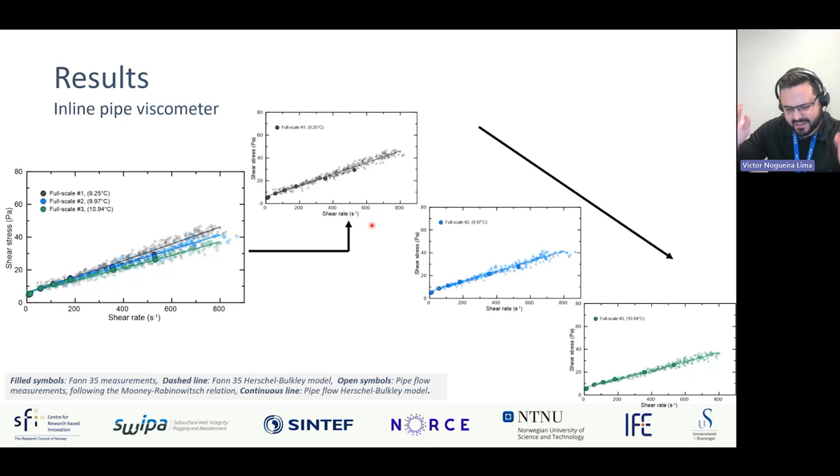However, until we reached this stage where we could attach the pipe viscometer to a full-scale batch mixer, we had a very long way where we tested different polymeric fluids, water, different scales, very small scales, then increased the scales, tested different cement pastes, and also tested different alternative barrier materials. By that time, we wanted to make sure the pipe viscometer could do the readings with very good agreement between a conventional way of doing the measurements and the new, inline way of doing the measurements, and that this could match without any impact or effect caused by the type of material we used.

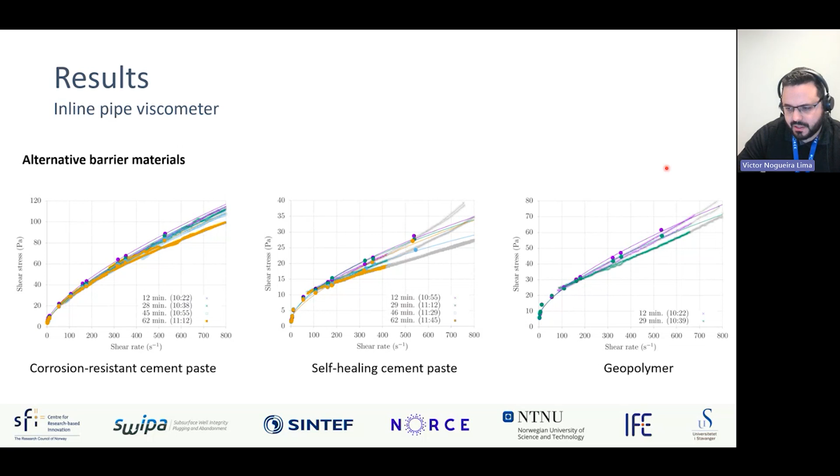So the second research point that I want to address in this presentation is fluid flow through fracture surfaces. That is the tracer gas activity.

So in this region, between the inner casing and the cement sheath, we create this debonded region that is basically the fracture surface, the microannulus. Yeah, so this is the object of study that I'm going to address in this part of the research.

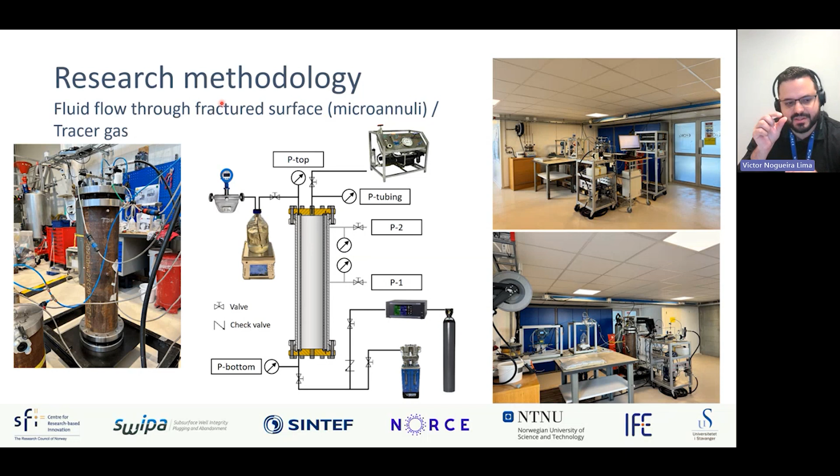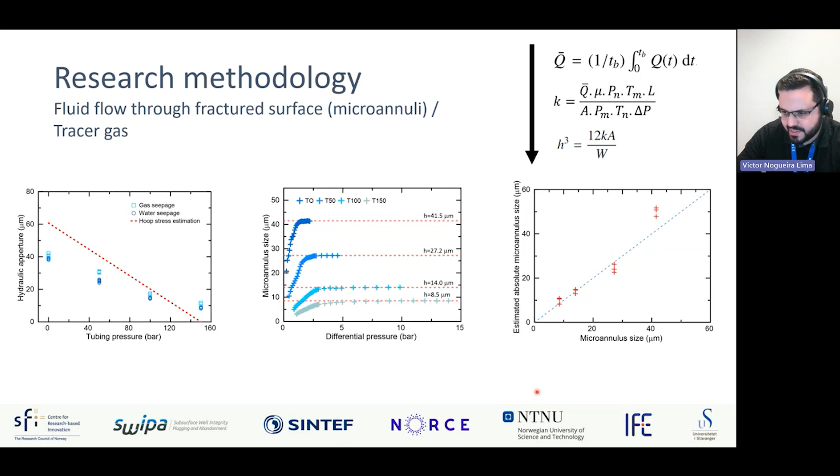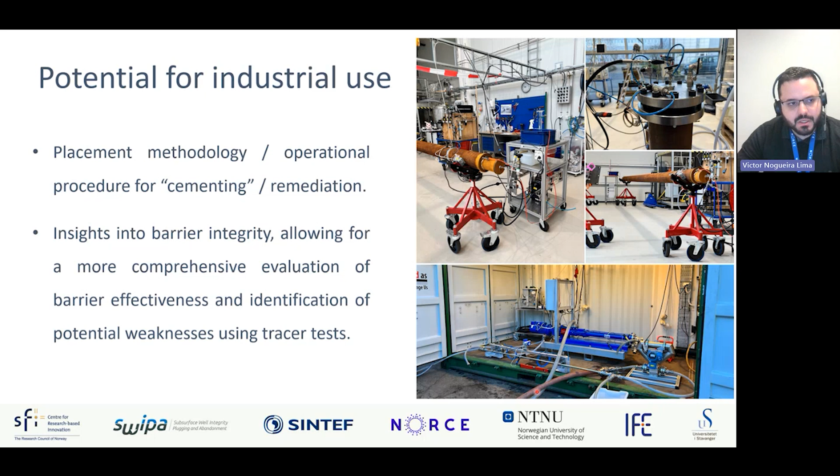And when it comes to the follow-up, I know that 12-15 minutes is a small amount of time to really dig into the details of this research. But if you would like to go further into these results, you can either contact us or go through these papers that we already published.

So I hope that I was clear enough in this time, and I'll be glad to answer any questions that you may have.